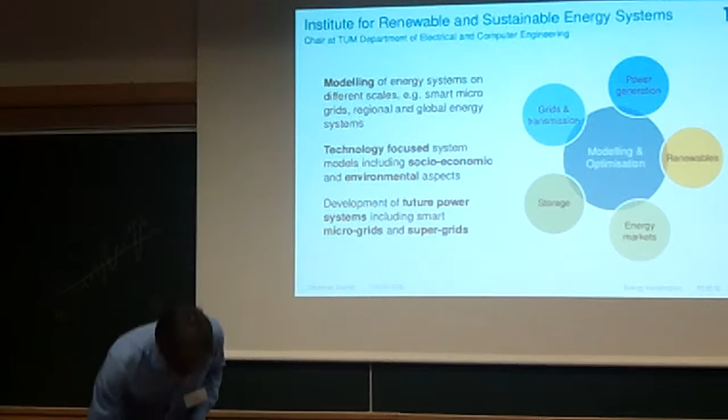So let me just give you a short background on myself. I'm an electrical engineer by training. I studied at the Technical University of Munich and did my diploma at an Institute for Energy Economy on the renewable supply of a fuel cell vehicle fuel station. And then I started my PhD there and moved to the Institute for Renewable and Sustainable Energy Systems while staying with the same professor, Professor Hamacher.

And our institute now, broadly speaking, can be summarized with a circle diagram on the right. So generally, we model or optimize possible future energy systems, and we consider, of course, renewables, the problem of storage, the problem of energy transmission between different locations and sectors, and where actually the power or the energy is generated.

So this is basically a key paragraph. We have technology-focused system models. That means we take our engineering training and respect the basic premises of what a power plant or an energy conversion can do, but depending on the study I'm presenting you, only very basic constraints are satisfied. So for example, in all of the results you're going to see there's no ramping constraints for power plants implemented. While this is possible, this is not done here for simplicity's sake.

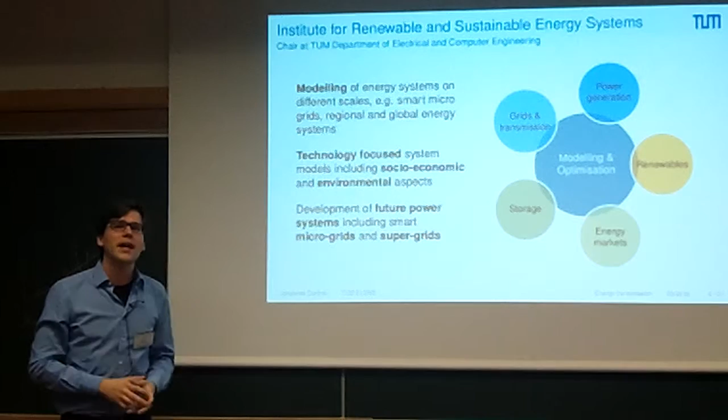And we still think the results have some validity, but not validity in a sense that you can really build it like it is shown. So always bear in mind, we're looking at visionary stuff, and it's just informing maybe a possible pathway. So I think I have disclaimed enough. We can now go to the meat.

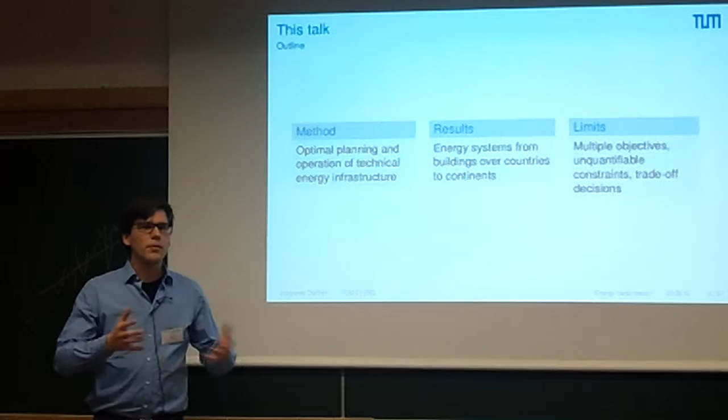So as I already said, I will explain how we do optimization. What do I mean by that? What do I mean by optimal planning and operation of technical infrastructure? Because we're both considering here the construction of capacities, that means generation, transmission, and storage, and also its commitment. Here in this talk, I'm always using a 1 hour time step resolution, but from the method, you also could go down to 1 minute. So again, for simplicity's sake and for traceability of models, it's at 1 hour.

Then I will present the results of 3 optimization studies we did during the last years. And then in the end, I will go to the limits of what we cannot or can derive from those results for our current situation.

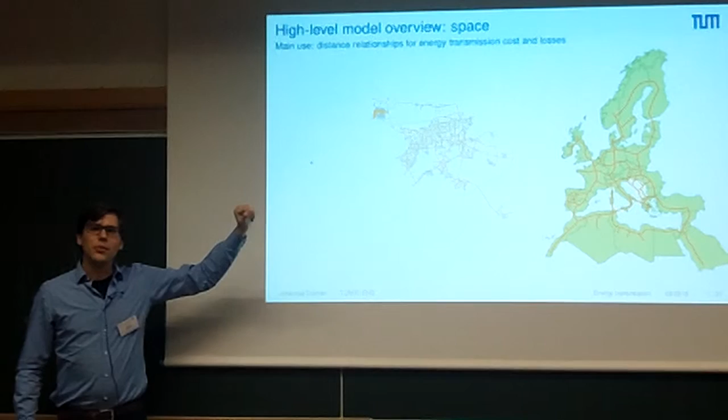Our optimization models, or many of the models we have heard about, they were all only considering time series or data curves. And implicitly, we're always assuming that space is concentrated in a single point, that energy can be exchanged. So in some of the models we also use this assumption, but we make it explicit by really visualizing it as a point. For example, in Germany, we very often say in modeling circles that Germany is a copper plate, and by that they just mean energy can be just transferred from any point to any other point.

And actually, that's how the energy market or the power market in Germany is organized legally. So any offer can be made at any point in Germany without considering whether there's actually a physical link that is capable of transmitting the energy.

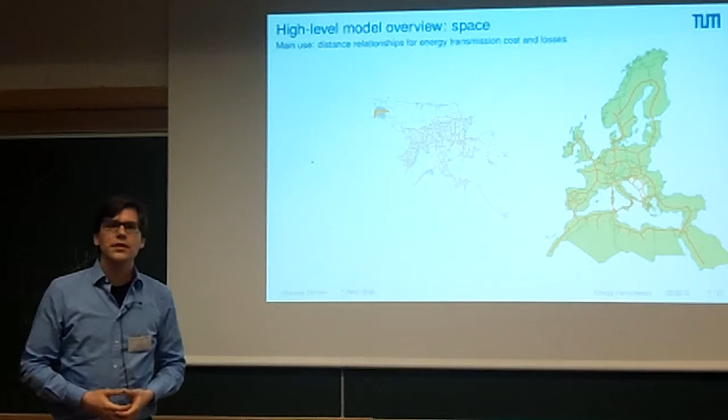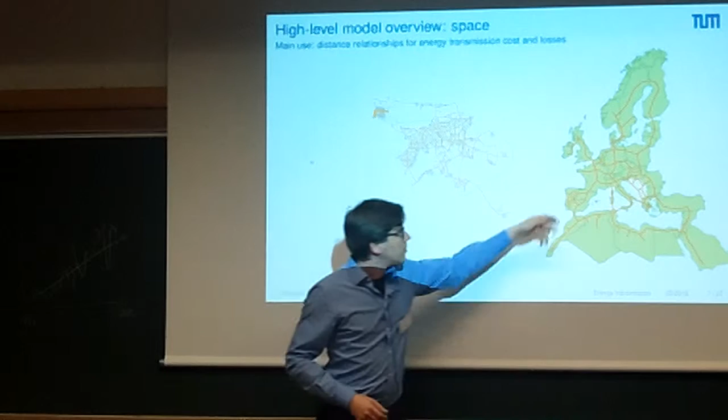So then if you're doing it more advanced, you always arrive at something like a graph structure, which just covers the link information, like how well connected is a certain location, as in the example of a small town in Germany, or here, very stylized, how the countries in Europe and Northern Africa might be linked. These graphs represent existing or possible transmission capacities. For example, France might be modeled as a point, linked towards North Africa, going through several regions, which will become important at a later result I'm going to show.

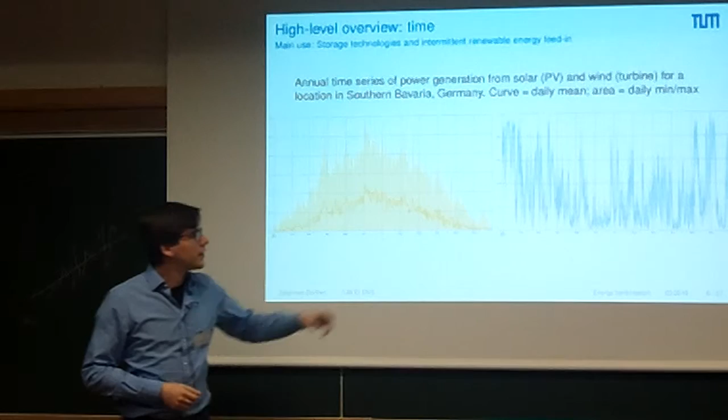As I've covered space and time, we're covering it here with a 1-hour time resolution. Here you can see, for a random location in Bavaria, the annual capacity factor time series for a potential photovoltaic plant and a wind turbine. The shaded area shows the minimum and maximum daily value.

Of course, for PV there's this 0 because there's always a night. The thick line is the mean value of each day. Here you can clearly see the seasonality. Whereas for wind, conditions don't change so dramatically over one day, but they can stay pretty bad, close to 0, for extended periods of time, several weeks. So purely local renewable energy supply is very challenging, which you can already tell from that.

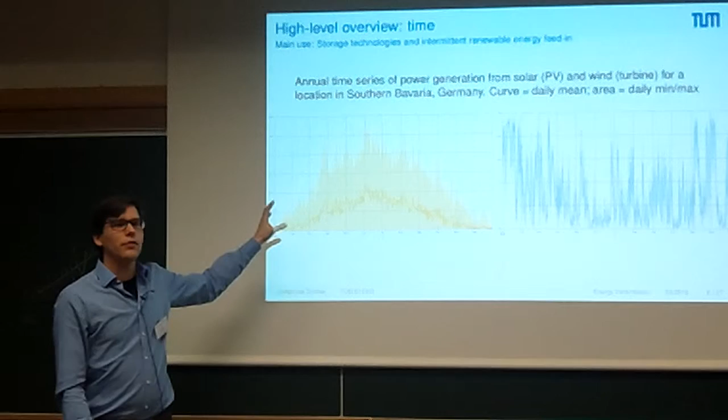And our models rely on plenty of those. So for each location, if you visualize Europe, we actually used 39 locations, all representing a country or a large region, and every region has 2 of those curves for a full year.

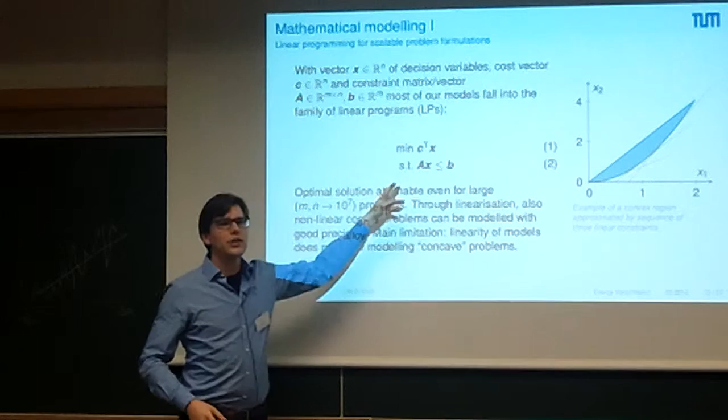It also assures that if you want to use a certain technology, the capacity must be installed and paid for via this equation. So while this looks quite simplistic, by using large numbers of equations, you can already be very advanced in what kind of problems you can model. The challenge then doesn't lie in the actual formulation, but in managing your assumptions, because the amount of assumptions in those matrices is huge. In practical work, we never see this representation directly - this is fortunately handled by standard software for us.

How do you connect the graphs with your optimization formulation here? Do you assume that each power plant is already located in a specific spatial location? I don't have the connection between the spatial issues and the production generation issues.

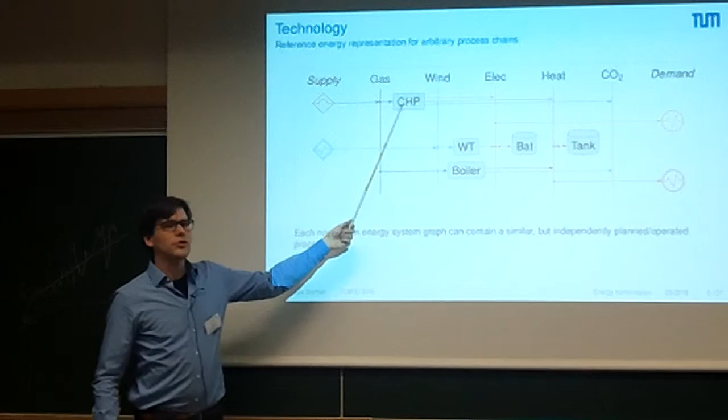Actually, if you assume that the gray box around here represents a country, then such a box, which might be labeled nuclear, would represent the whole fleet of nuclear power plants in that country. So you don't have any network information? Within that region, no. And if I wanted to make a national study, I would basically split up France into 20, 50, 100 single vertices and cover that.

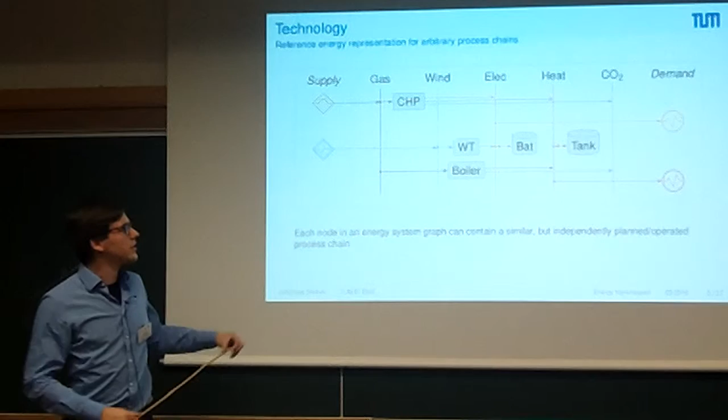Then how do you connect the splitted regions? This is omitted here - it's basically covered by providing the graph of all possible connections. Actually, those connections again can be conceptualized as a process box which has a certain capacity, which either can be chosen, which is then part of this variable, or you can just say they're connected. So I'm still not at the...

Yes, so if I want to increase the resolution, I just have to increase the number of nodes. But actually a colleague who is finishing his PhD right now is doing this with, I think, 600 nodes for Europe. So there he goes to the regional level, but it's not ready yet, so I cannot show these results.

So for the sake of simplicity I cannot go into all the scales - I just want to give you a feeling of what you can do and what you cannot do with these models. Actually, they come from the domain of operations research and have been used for a huge domain of stuff, and here we are just using them for power or energy systems.

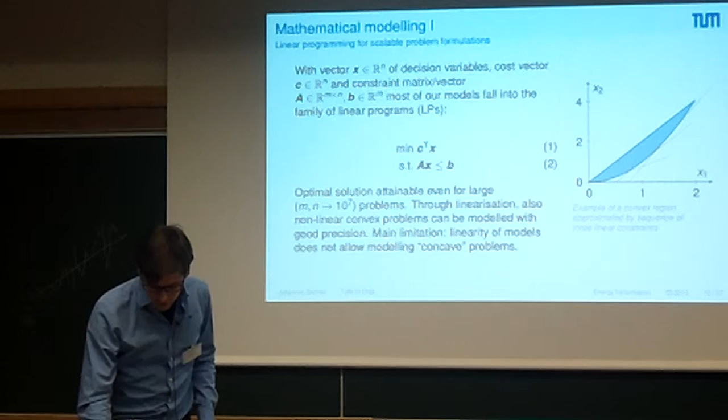One more theoretical slide, because you might think that linear formulations are very limited, and yes, in a way they are, because they only can capture so-called convex problems, which means they always go for the cheapest solution first. So by parameterizing the previous problem and saying give me the cheapest solution for the European power system, it always just goes for the cheapest solution first, which might, for example, be wind in Spain, just let's assume. And it uses it up until the capacity I've allowed it to use is exhausted, and then it moves to the second cheapest solution.

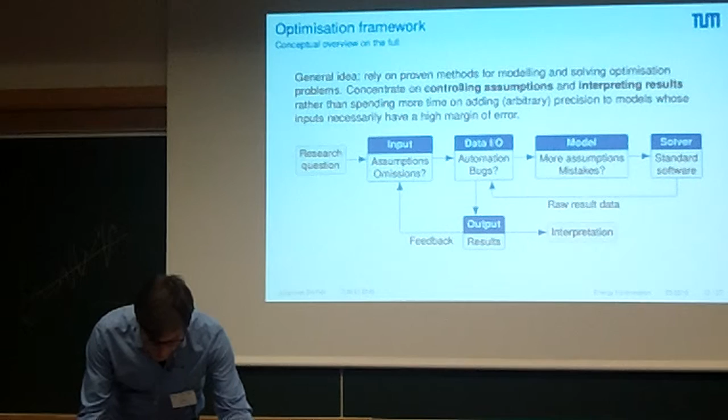And move to the preparatory slide for the results. So I will give you the results of 3 studies we did on different scales. I started at the local scale of 20 smart buildings, then moved to the national scale, and in the end moved to the international scale.

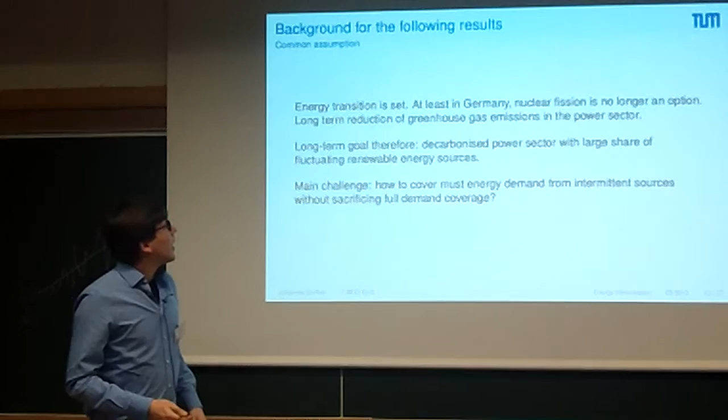So for all those, basically the energy transition is just assumed to be set. We're in the future and we have decarbonized the power system to a large degree. And then the question is how we can use intermittent sources to cover the demand.

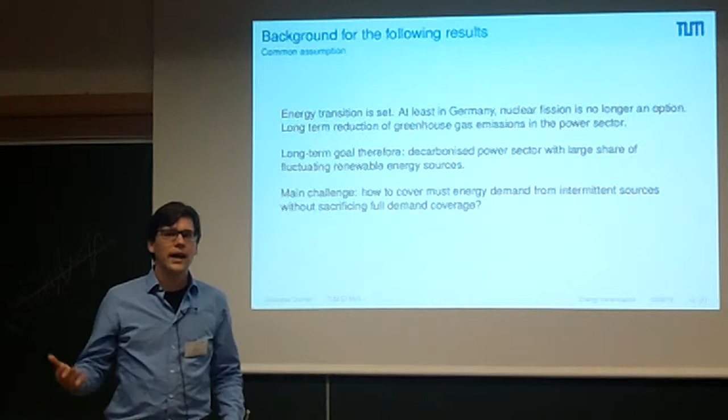In terms of demand, we are just assuming that current levels of electricity demand continue in the future, because there are lots of trends which say they will grow, other trends say they will fall. And as we are going into the far future anyway, we just assume today's power requirements.

So the first study: assume we have 20 smart buildings, and each of them has a pretty fancy energy system. Again, these are the boxes I was talking about before, so these just show the availability of technology, not their size. Those will be determined now by the optimization itself.

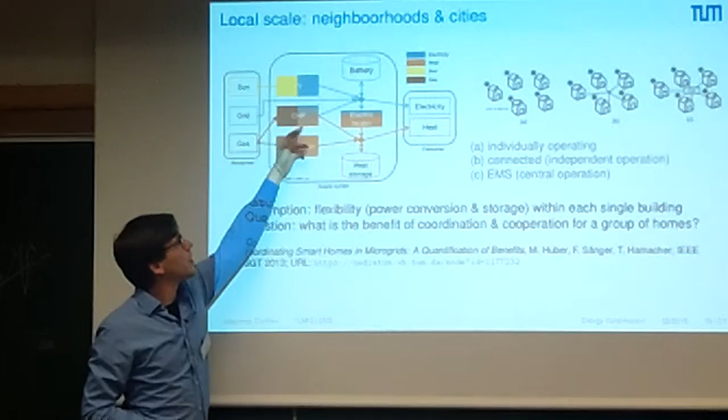So the consumer has 2 types of demand, electricity and heat, represented by an annual time series. They can use either local sun, the electricity grid, or some gas, which can be burned in a CHP locally, which then produces both heat and electricity, or use PV, which only produces electricity. Maybe use some excess electricity for electric heating, possibly install heat storage and a local battery.

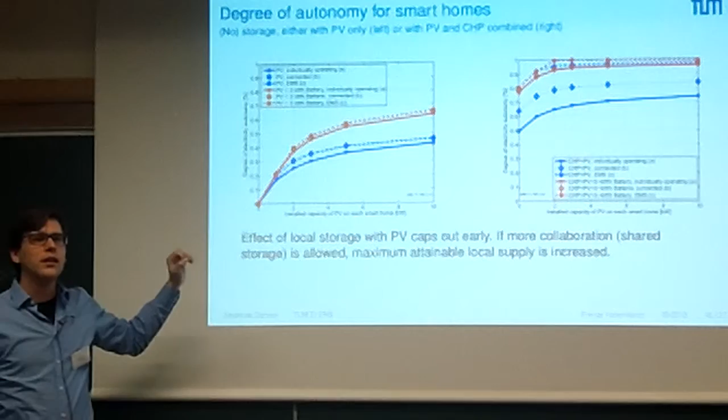And this happens in every building. The question now, asked by my colleague, was what degree of autonomy could such a building feasibly achieve? On the left, you see the results only in case you have PV, no CHP - combined heat and power, sorry, acronyms. And on the right, also if you have CHP and PV.

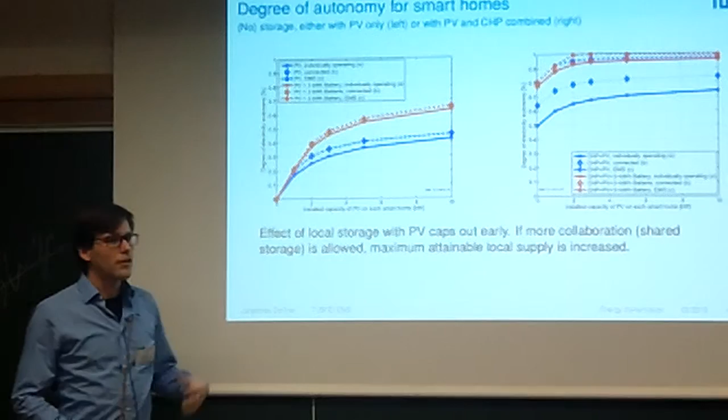Here you see on the x-axis the amount of PV that is installed on the smart building's roof, from 0 to 10 kilowatts. And on the y-axis, you see the degree of energy autonomy that building could achieve. In blue, you see PV without battery, and in red with a very reasonably sized 3 kilowatt hour battery, so actually pretty small. You see that the attainable autonomy does not exceed 0.6 for an individual building.

And here these other lines which are dashed show that if the buildings cooperate, that they pool basically their storage, they cannot really move up much in terms of their autonomy. So on a local scale, basically, without giant capacities, they are basically screwed.

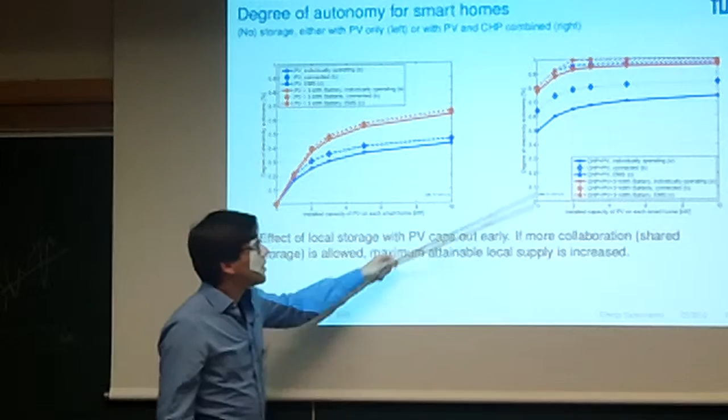But here we found, or he found, that if you add CHP, which is just basically another degree of freedom in providing local energy, you can go very high in your energy autonomy, which is actually not true, as you then rely on bought gas and basically use gas as a flexible way of providing local electricity.

But when you add CHP, then you also make sure that indeed the heat is used or heat is available when necessary - it's not something which you smear out, but you use it when necessary. Yeah, the heat was winter, summer, different, and so on. So in that case, the CHP and the PV basically...

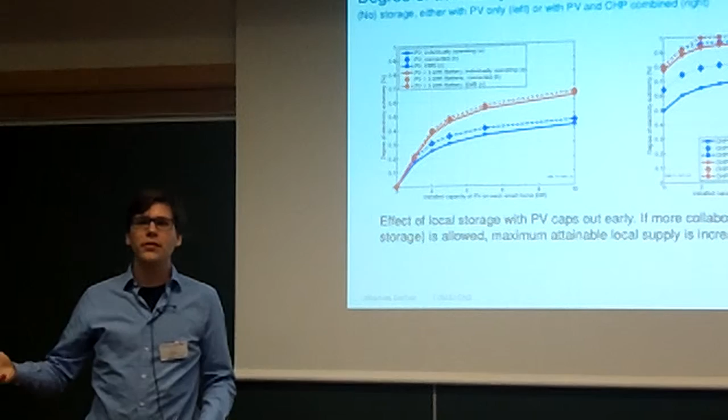...synergize perfectly, because in the summer you get more electricity from PV, and in winter you can use electricity basically as a byproduct from heating, which you then do anyway. So in that way, some synergies could be found.

And this is also one of our main trajectories right now, that coupling the heat sector and electricity sector might be one of those hidden - not low-hanging fruits, but medium-hanging fruits - where we still might get some potential for future optimizations.

Sorry, I have difficulty understanding how you can get 40% of autonomy with PV alone, knowing that the PV capacity factor is around 10%.

Yep. I think there I'm reaching the end of what I can basically answer on the fly. But we can look up the numbers. I have the paper open here, but I think it would just cost too much time. But I'm quite sure the numbers fit.

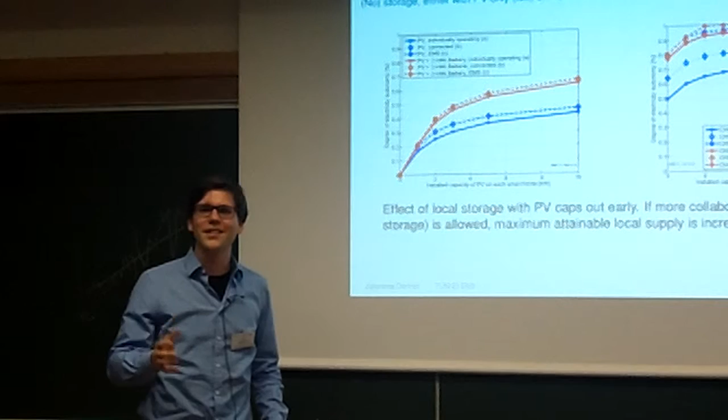So let's move on to the national scale. Here basically the problem to be solved is quite similar to the previous talk, and the numbers also match in the result. The question asked here was - this is a PhD thesis by a colleague, finished in 2012 - and the question was energy transition in 2050.

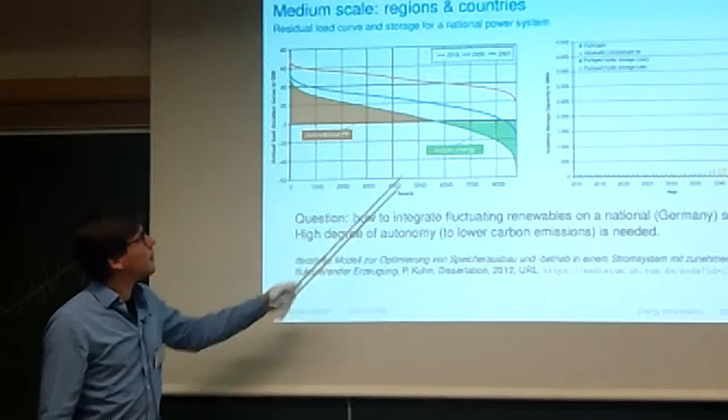Here is plotted the residual load duration curve, which means basically the power demand of Germany minus the intermittent renewable power feed-in at the time, sorted descending. So this is basically 2010. We have always at least something over 20 gigawatts to be covered by conventional power plants.

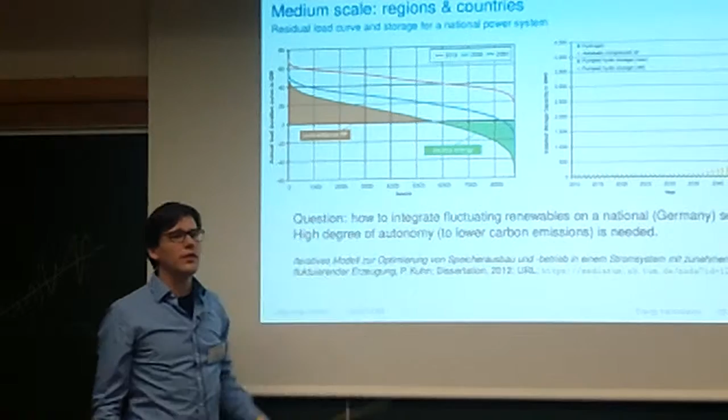Whereas if we assume a scaling up of intermittent renewable supply, the green curve emerges, and there we have a large share of surpluses, which were mentioned earlier, and a much more unattractive triangle to be covered by conventional power plants.

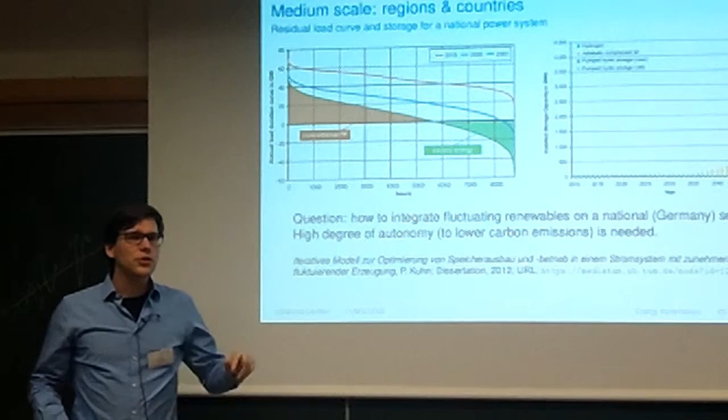And if we now assume that Germany has to do it basically all on its own and cannot rely, due to the strong coupling between its neighbors, for covering the gaps, how would storage have to be built up? Here you can see basically the result that was derived from a time series analysis.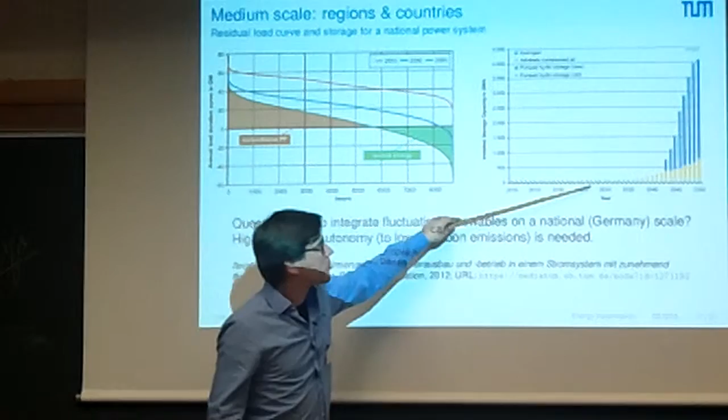Here down you can see pumped hydro storage as we have it today. And here the blue area is basically the cheapest technology that was included in this thesis, hydrogen storage, which basically uses electrolyzers and then later gas turbines to burn the hydrogen with a not so good round-trip efficiency.

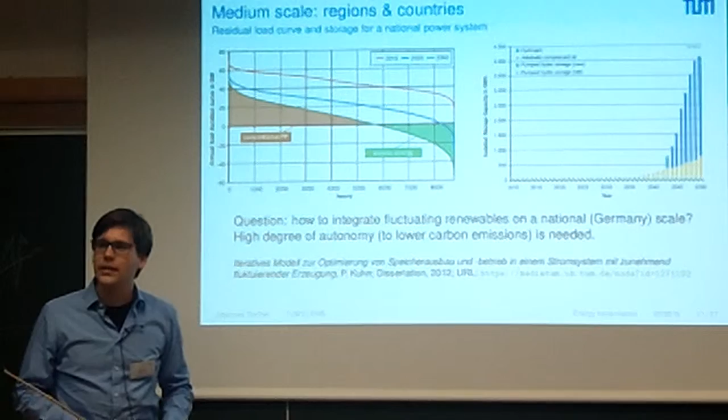Sorry, then you use fuel cells or power to gas? No, just burning the hydrogen. Okay, so really the round-trip efficiency was not so high. Again, I don't want to tell you the wrong numbers, but it was, I think, below 50%. I think it got to something like 30, but yeah, don't quote me.

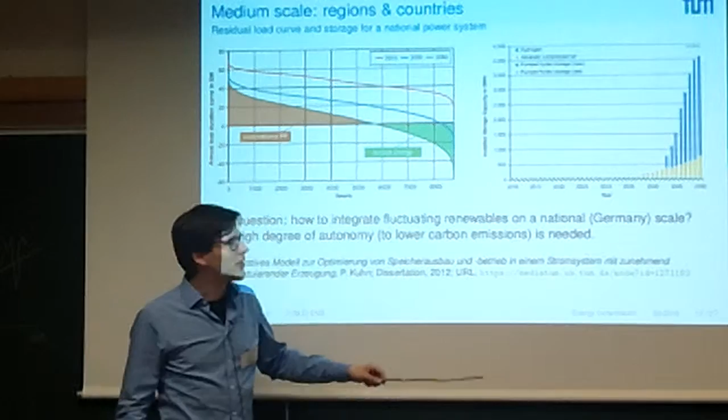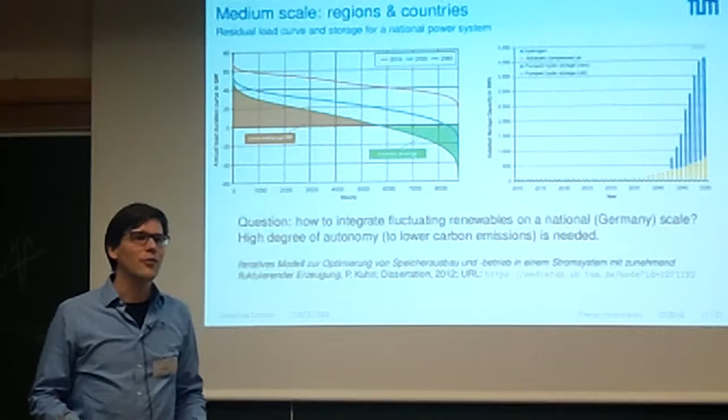He did the numbers. And here in between you see a small wedge of adiabatic compressed air storage, which is used because it was assumed that there's no additional capacity for pumped hydro storage, which would have been of course the cheaper option, but as environmental concerns are an issue in Germany, and also topography is an issue, there was not so much potential for more growth in that technology.

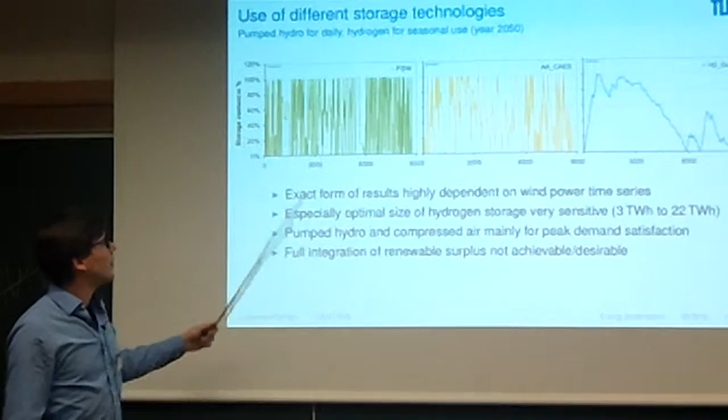And just for added visuals, here you can see how in that study the storages were used. Pumped storage, like today, basically had a day-night operation cycle. Here you can see the filling status of those aggregated storages. The compressed air storage basically, I would say, flattens out the wind stochastics, and hydrogen is just used for seasonality.

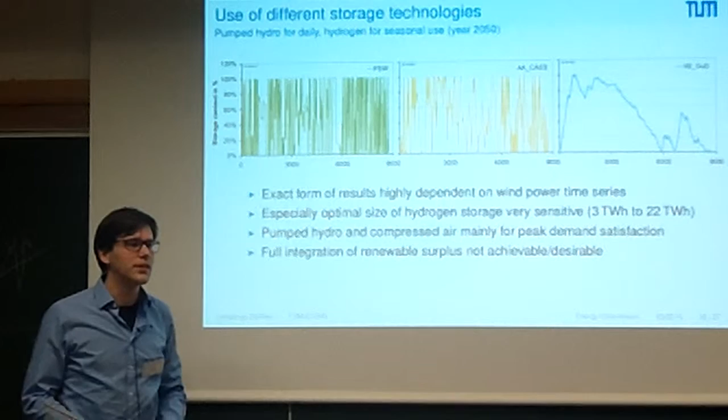And even with that, full renewable integration was not possible. So still there was a surplus, even with those giant capacities - maybe you've seen it, close to 4 terawatt hours. So it's in the single percent digit fraction of the annual demand.

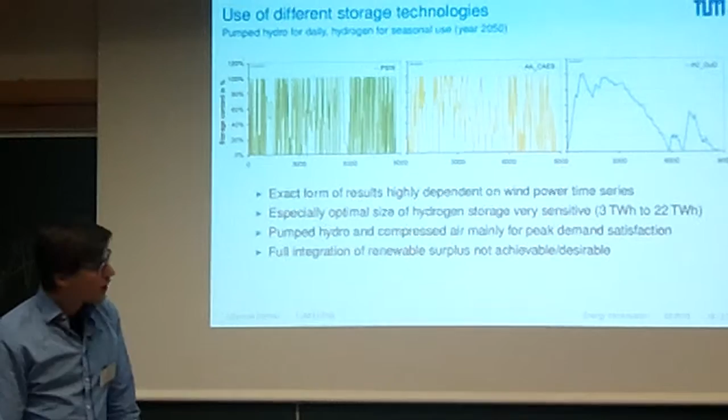And one problem, of course, with such a study, it's very sensitive to the actual time series that you use, both for demand and for the renewable fluctuations. So depending on the actual time series he used - he entered, I think, over 10 different weather years - the optimal power storage or energy storage capacities varied from 3 terawatt hours to over 22. But this is just a result from those strict constraints that you have to basically be fully renewable within Germany without any help. And then you get such high degrees of variation.

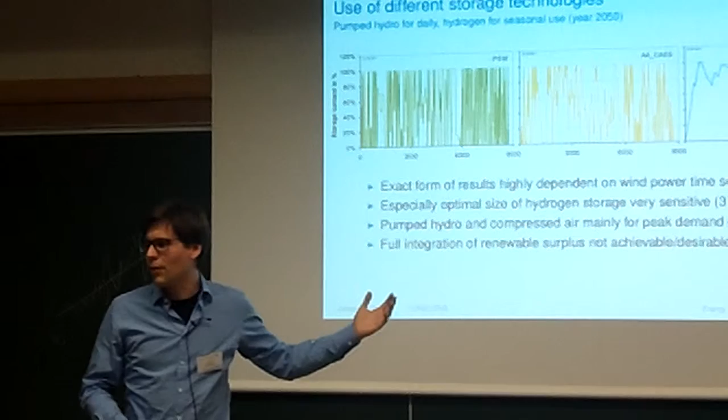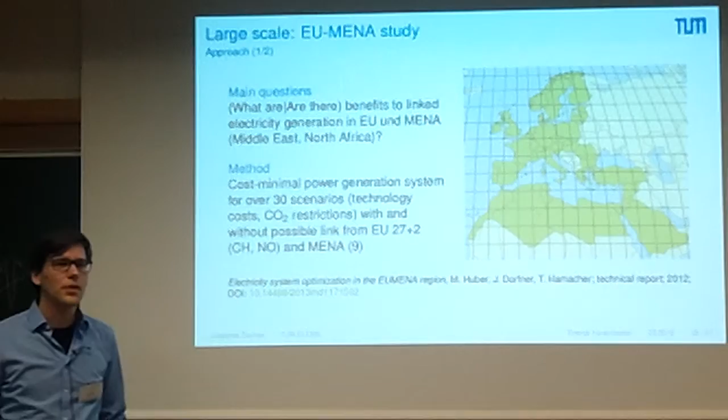So the last result - now we're going from the country to continent scale, and we're not keeping it at Europe, we're also integrating North Africa and the Middle East. This was a study we did for the Desertec Industrial Initiative in 2011 or 2012, and we were allowed to publish a report on that work in 2012.

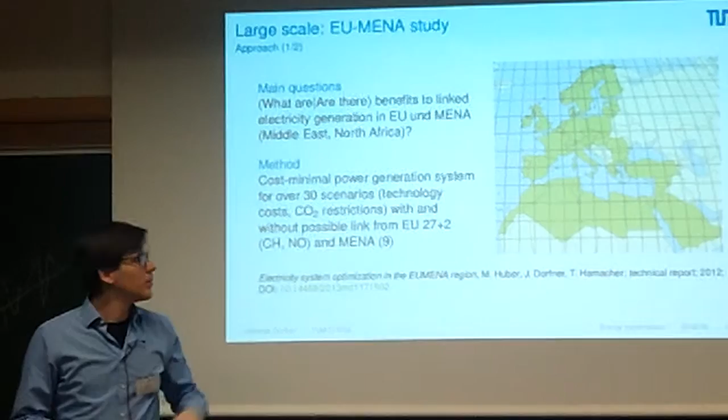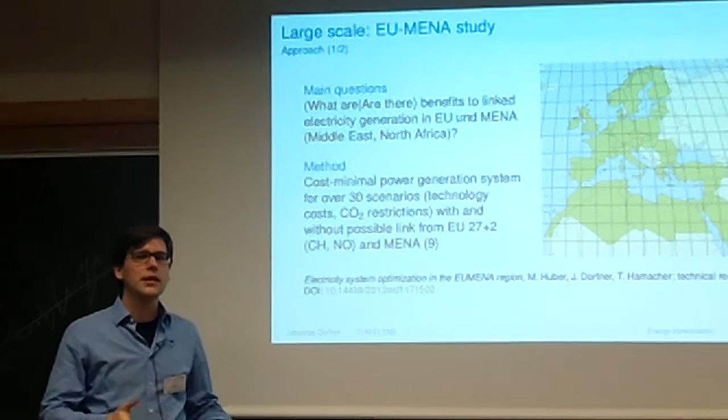And there, basically, we just assumed we want a cost minimal power generation system for those 39 regions. Some countries were split into several regions because the transmission links would become very important in the solution we obtained, so we wanted to be sure that we capture where the main interconnectors between countries are. And we wanted to achieve a 95% reduction of CO2 emissions compared to today's level, basically meeting climate and greenhouse gas reduction goals.

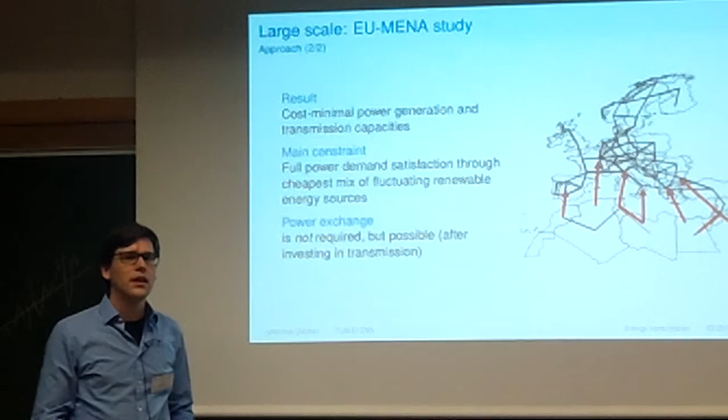So here you can see the graph that we used in the study roughly, and here basically were our rough possibilities for connecting north and south. And the question now was whether the decoupling, the lack of correlation in weather between here and here, would be enough to improve upon the situation that we would have if we just connected Germany and France.

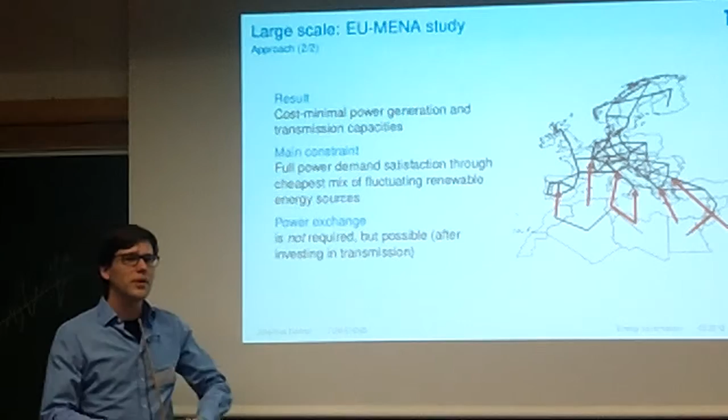And maybe Germany and Spain, if that's possible at all. And of course, we assume here complete frictionlessness in politics. We just say that's possible, and let others deal with the implementation. But we thought it would be important to find out, does it have value in case it's possible? And then we can think about whether we should try to do it. So this is really just a maximum feasibility study.

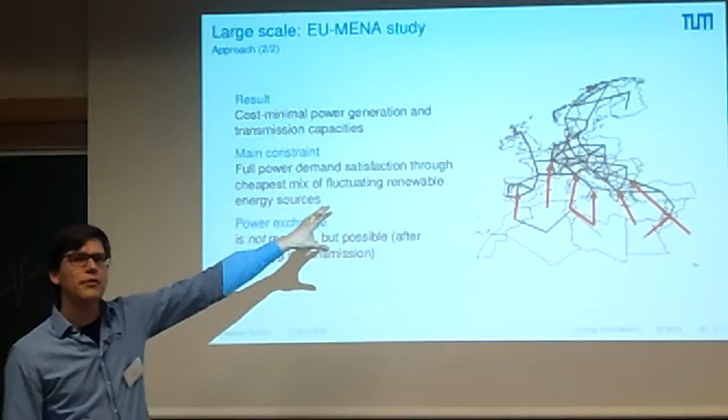And again, nothing in this graph is fixed. It's not predetermined that there will be a certain power link here. It's just part of the optimization to determine how much is the optimal linkage. So which mix of renewables, and which kind of renewables would be built, is not set up before — it's all part of the optimization.

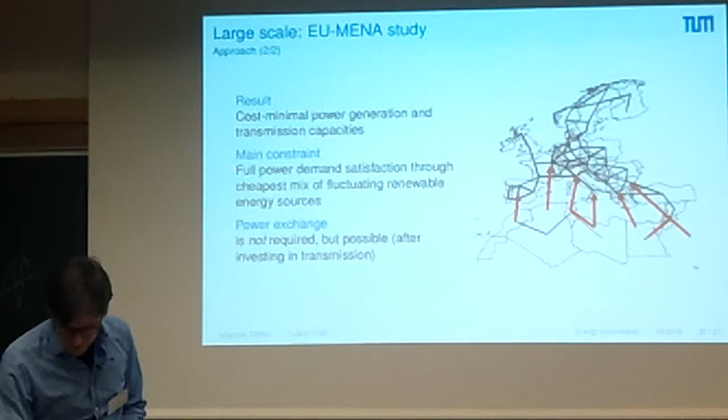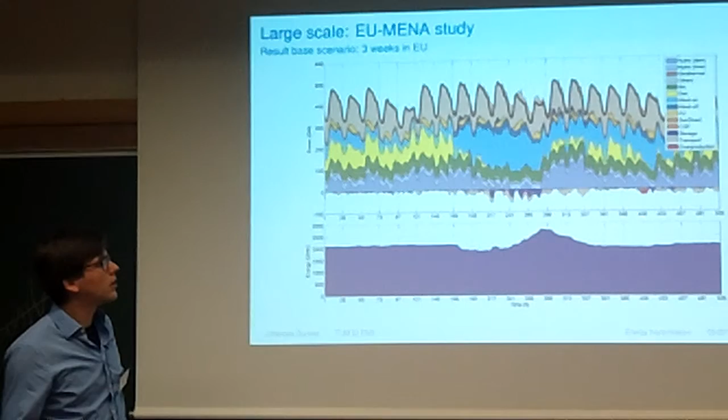And here you can see now, because it's the most graphic result, three weeks of power generation in the EU, in the northern countries, for the optimal mix that we obtained. So in bright yellow, you see the only non-renewable source. These are the 5% of emissions that were still allowed, and which are in part responsible for us not needing giant storage.

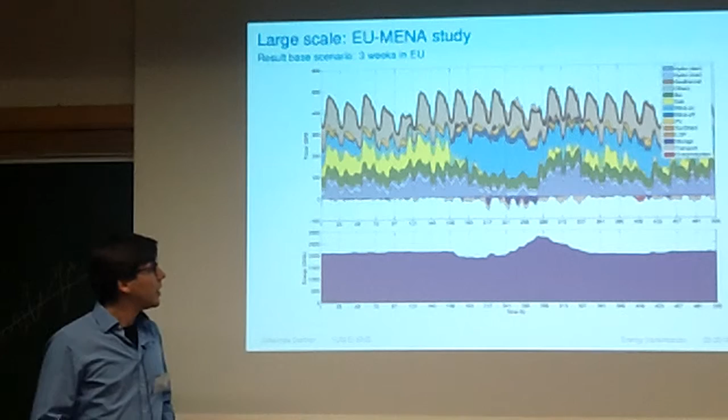Here on the lower graph, you can see the aggregated level of power or electricity storage in Europe. You can see this is like 2 terawatt hours total capacity. And as far as I remember, we didn't have any additional storage installed in the study compared to today. So I think only what was available in the Alps and the northern part of Europe was enough to cover everything. Here, the dark areas show you when the storage is used.

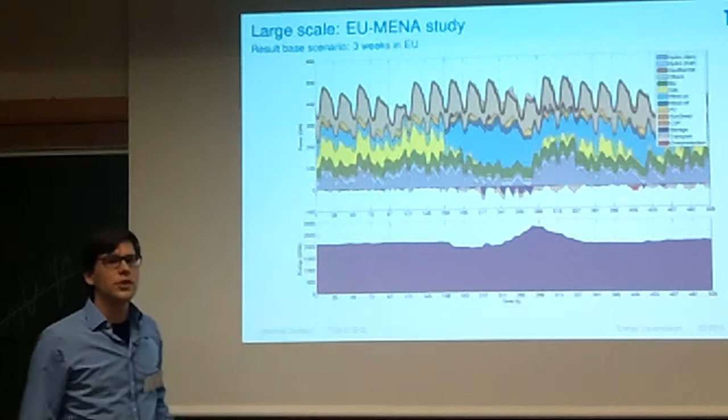And in the big blue areas, you see wind, which is our bulk electricity in this scenario. In Europe, you see small shares of photovoltaics used as well. And then you see this large area, which is import from the southern countries, which are not shown here — they are shown in this graph.

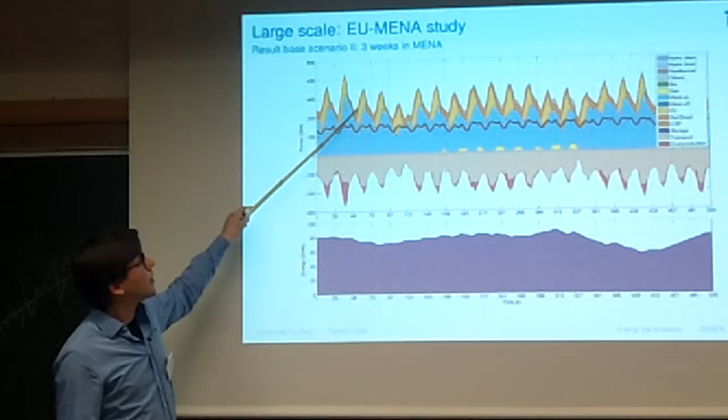And here you can see in black is the demand. And you can see they are using big capacities of installed wind power, mainly onshore. Then also huge capacities of photovoltaics, and a little bit of concentrating solar power, which is used to be able to also cover the nights.

And yeah, they also have storage, but quite moderate. Actually, they are always oversupplying their own demand. And here in those pink areas, you also see a surplus which occurs in this scenario. But of course, as it was asked to give the cost minimum, not the maximum integration scenario, some surplus was to be expected.

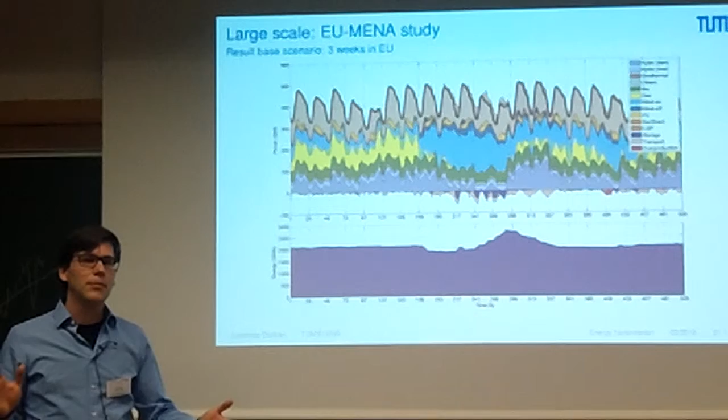So under these conditions, we just obtained that it would be the cost minimal solution to strongly couple. So just to go back, this is equivalent to, I think, 18% of whole European demand being imported from the southern countries, just because their full load hours of renewables, mainly wind, are so much better than everything we have up there. Plus the decoupling between Northern Africa and Europe was good enough.

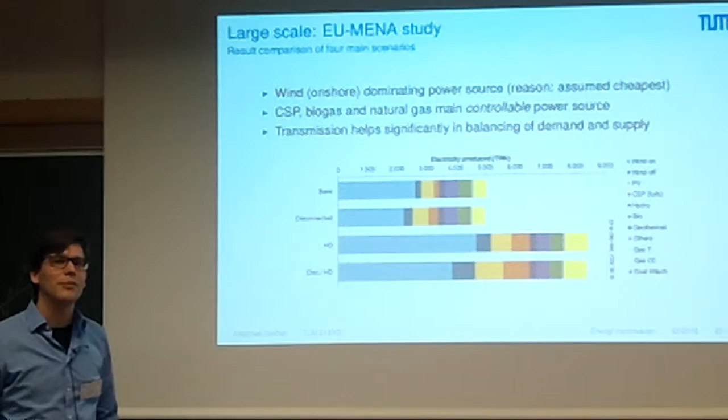Yeah, here you can see again the annual fuel mix for the whole region. You can see that basically half of the energy in that scenario is coming from onshore wind, a little bit of offshore wind, some PV, a little bit of concentrating solar power, and chunks of hydro and biomass. And this is basically the regulation that we assume from gas power plants.

I'm open for questions still. It's so silent.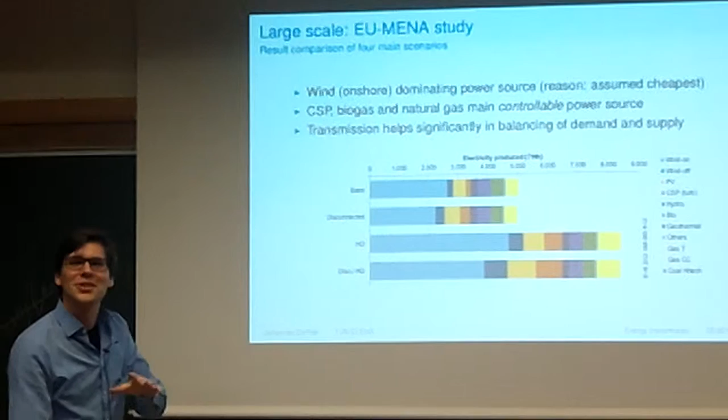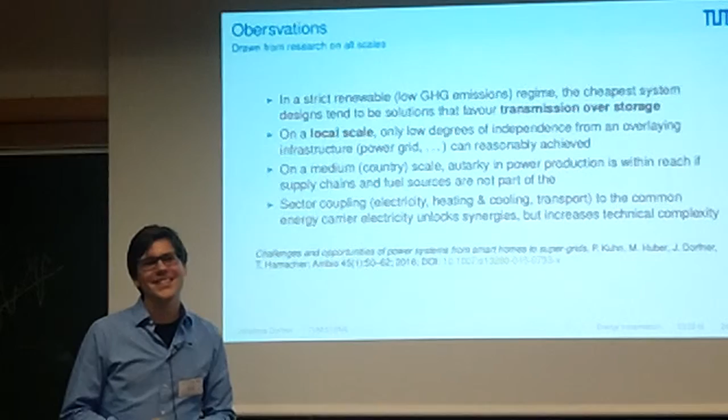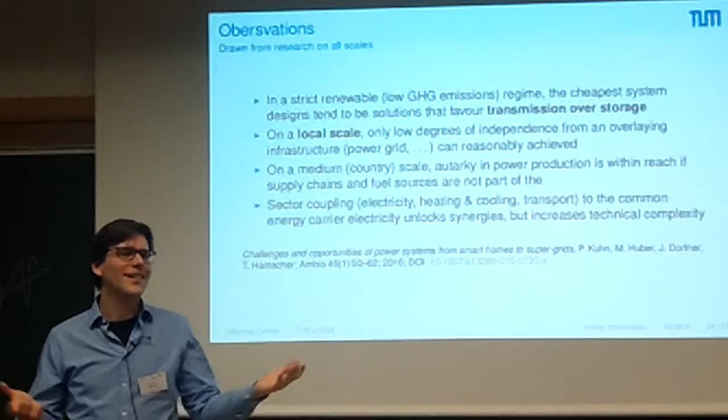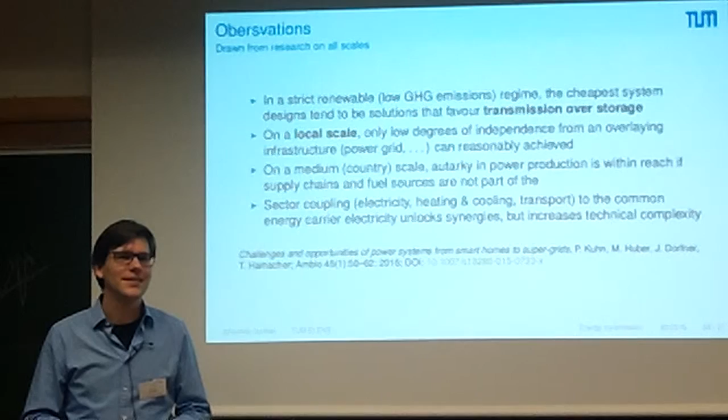If I'm thinking about this, the first thing that comes to my mind is that if I were a terrorist sitting here, and I was thinking about long transmission wires going across, for example, Libya — man, could we just bring Europe to its knees like that? As I said, politics were not part of that study, and I don't think this is going to ever happen. There's just no way those guys who aren't too keen on us are going to say, well, all I've got to do is take one of my bombs that I set off every day in Baghdad and stick a few of them along the pylons that run over hundreds of miles, and I assume we'll be in a situation of blackouts pretty easily. And all that investment, all that energy investment will go down the toilet.

Any other good idea? Okay, please — I'm not sure I can answer within the constraints of my method here.

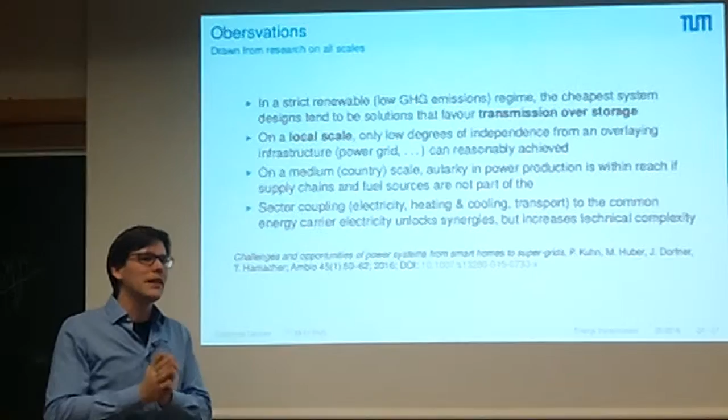You could add stochastics, for example, and have a reliability criterion. I did something like this in my own PhD thesis, but it would basically increase the cost of the systems - the more interconnectors you want to be able to lose before having a blackout, the higher the cost. So instead of maybe only 3 interconnectors, you would need 5, so that the cost of a terrorist attack will increase. But it's a numbers game.

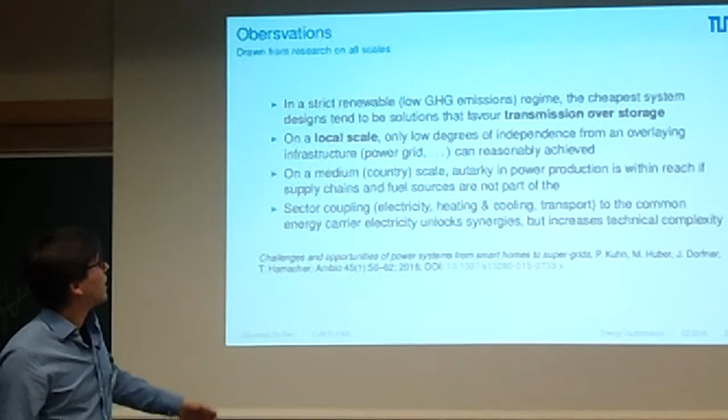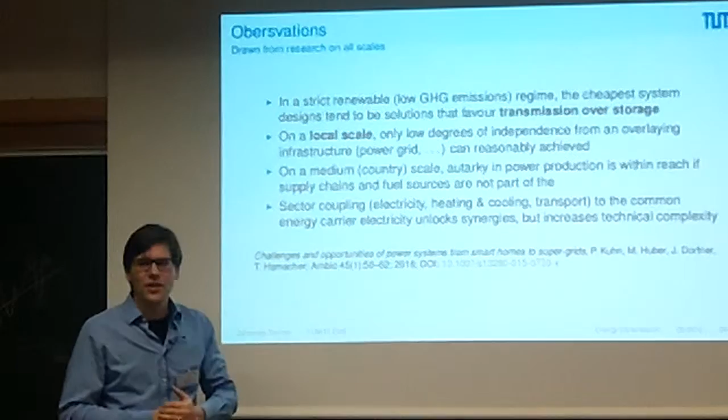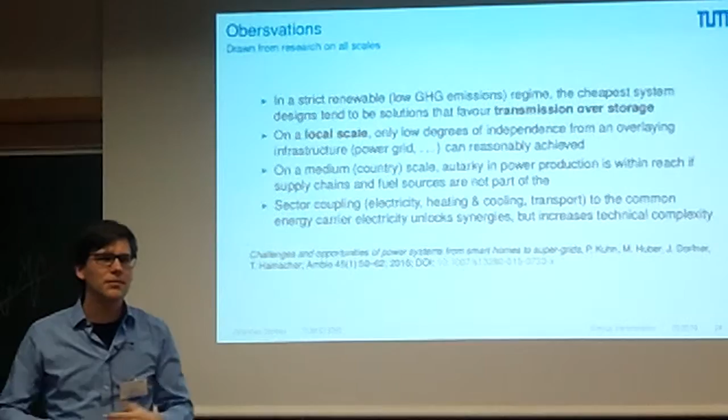So to take a step back, what were the common observations? Because we summarized those 3 papers, or some more papers, in a recently published synthesis paper where we basically reflected upon the results. May I just finish with this slide and then we continue with the discussion.

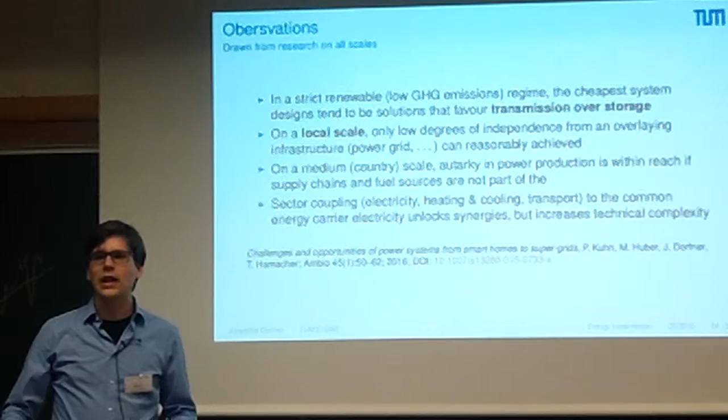What we were seeing across all these studies is that sector coupling helps. There's another PhD thesis recently, a continuation of the German studies I showed you, where the heat sector was included, and the need for electricity storage basically plummeted as soon as you allowed large-scale power-to-heat usage, because then all those surpluses could be relatively easily integrated into large-scale district heating systems, which are quite common in larger cities.

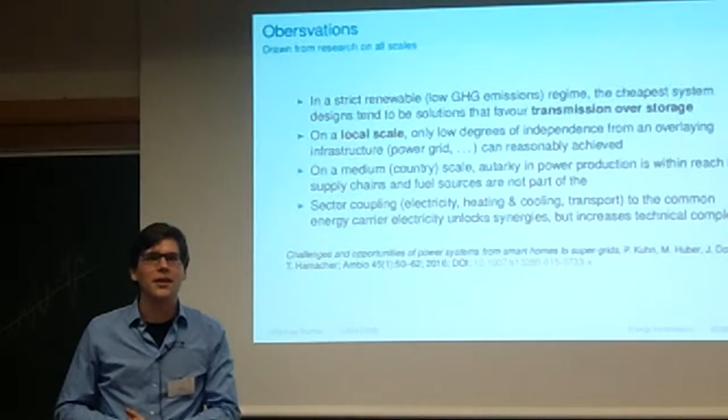And as we go up in scale, and in the amount of vision that we allow in political vision, or the amount of collaboration and frictionlessness of implementation we assume, we are able to unlock more synergies technically. Of course the problem of implementation remains open, but at least maybe there's something to keep in mind when thinking about the feasibility of current measures.

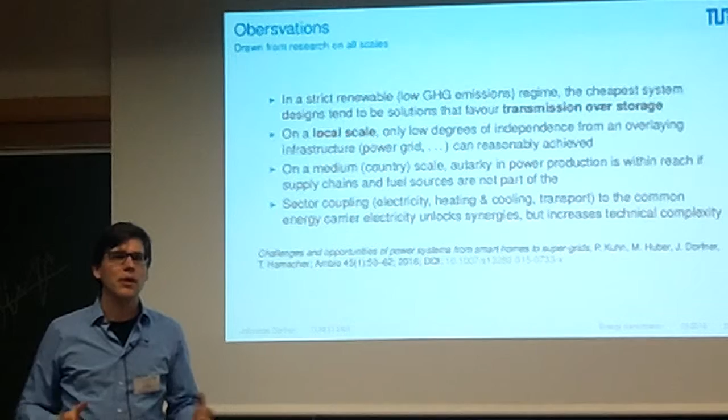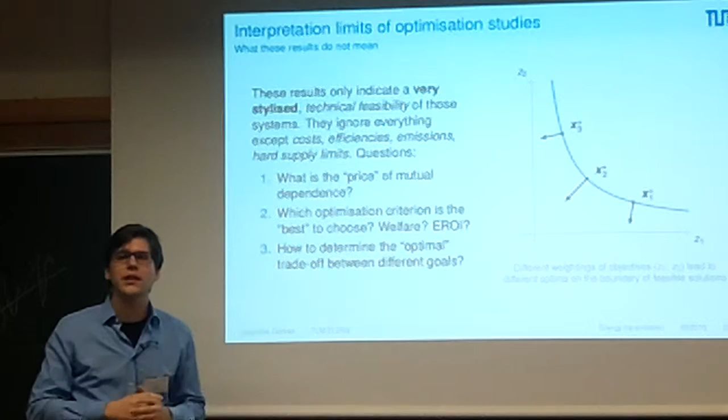Now to make one step further - because I've thought too much about optimization models - in the end, everything just boils down to: give me your limits. What are you willing to assume for how much renewables you may build up somewhere? What are your costs? And especially, what is your objective function? Because in all those studies right now, we just went for minimum cost solutions. But instead of minimum cost, you could also minimize for something else, or even a mixture of goals.

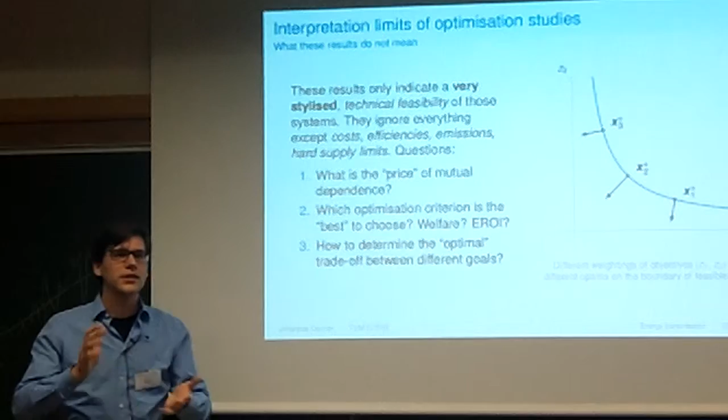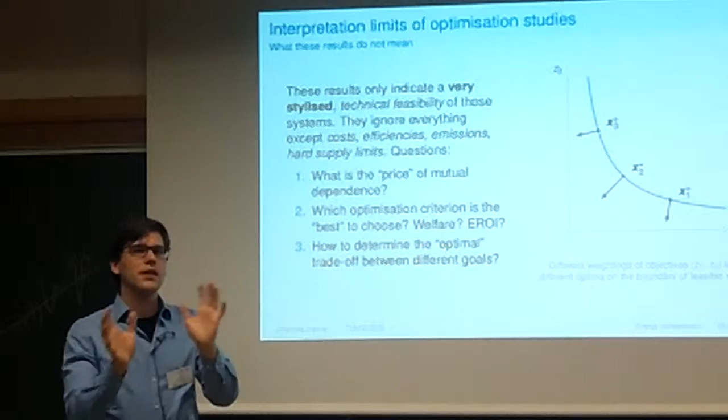If you visualize Z1 and Z2 as a subset of two of arbitrarily many goals, and you just tell me in which direction your optimum is - which you could visualize with this arrow - those models could basically tell you where your boundary of feasible solutions lies. So depending on how visionary you are, your boundary shifts in place, and depending on your goals, the location of your optimum solution varies. In the end, it's just a matter of your assumptions and the priorities of your goals, which tell you the boundary of what you can achieve.

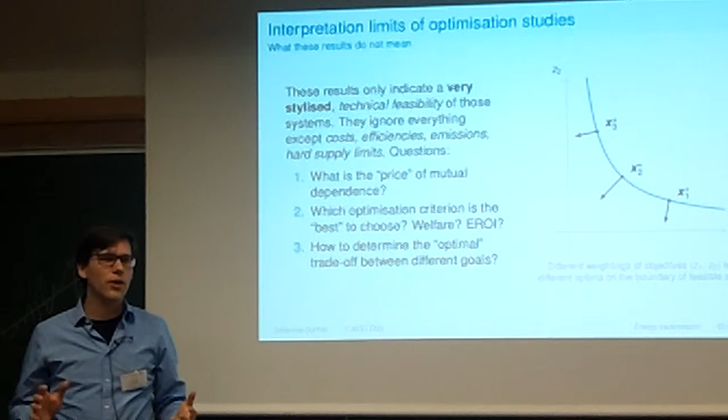And of course, the real implementable solution will never lie on that boundary - we always have friction, institutions, protests, inner conflicts, but at least we can establish the margin or boundary of feasibility. This is what we can do with such models, which some might consider daydreaming, but maybe it's more important to say this is definitely something we cannot achieve, so that we can discard what really is daydreaming and instead focus on areas where we can select from solutions we might actually achieve. And yeah, that's it.